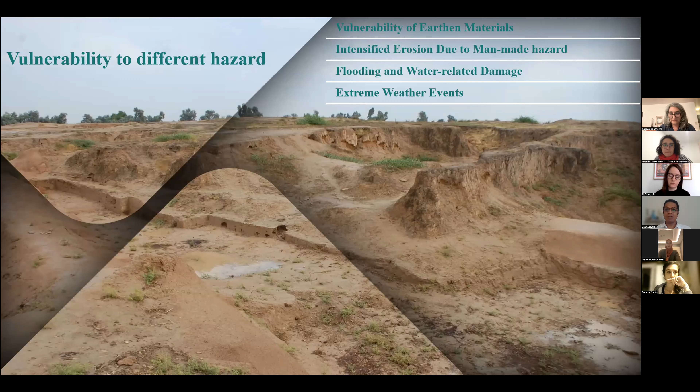For answering the first question, we need to know that the most vital part of earthen construction is directly related to the knowledge of traditional architects or professional masters in dealing with earth and their perception of different risks. Their experience in recognizing ready-to-use mud, adobe preparation, and application methods is entirely based on their tacit knowledge and practical experiences.

Their experience over the years, along with the different environmental conditions, has provided the base for creativity, the use of indigenous capacities and best practices, which can be considered as a practical factor in today's challenges. Therefore, traditional knowledge of local and indigenous people is increasingly recognized as an important source for the conservation of earthen heritage, and it could be introduced as one of the low-cost strategies in the long-term sustainable conservation of earthen heritage

against different hazards. But the transfer of this traditional knowledge has always taken place through the traditional master-pupil system. And the biggest weakness of this system, if we can say weakness, was the lack of documenting and recording this information and the verbal transfer of knowledge to each other. Forgetting traditional knowledge of earthen heritage due to various factors such as modern materials and new challenges, you name it, leads to abandonment of earthen cities.

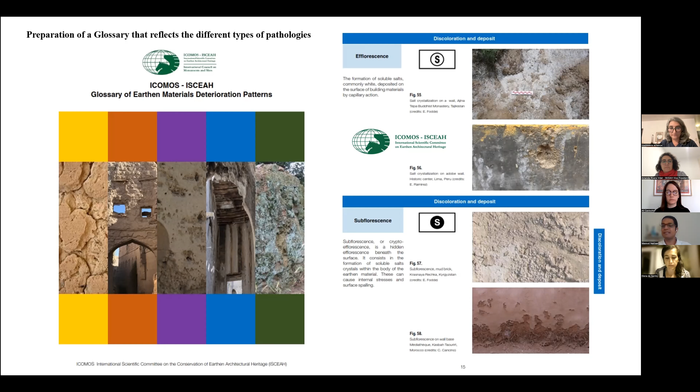For this purpose, in the last 3 years, we have been collecting traditional and modern knowledge of the conservation of earthen architecture. As you may know, conservation is an ongoing cyclical process, and understanding the current condition of conservation techniques is an essential first step to good conservation practice. This database could provide a useful resource for the conservation of archaeological sites in various topics such as methodology, material modification, climate change adaptation, conservation, and restoration.

And in some cases, traditional techniques alone are obviously not able to protect the earthen heritage, and it is necessary to collect and evaluate modern conservation methods. Applied modern techniques and strategies in different parts of the world can act as a useful source to deal with hazards and vulnerability when traditional knowledge cannot meet our needs. At present, it is necessary to collect various conservation techniques, including traditional and modern techniques that have been done in different parts of the world, and to complete the purposeful studies of ISCEAH with the aim of conservation of our valuable earthen heritage.

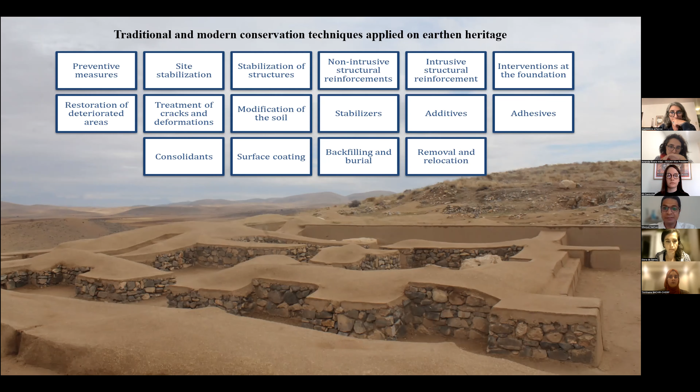The database of traditional and modern knowledge and techniques of earthen heritage could be useful in different studies, and identifying the most appropriate methods will also prevent common and ongoing mistakes in the conservation of earthen archaeological sites. In the end, evaluation of the strengths and weaknesses of these collecting methods could also help to progress the Earthen Heritage Charter and climate change action, as well as evaluating the current state of earthen heritage conservation. So that's it from me.

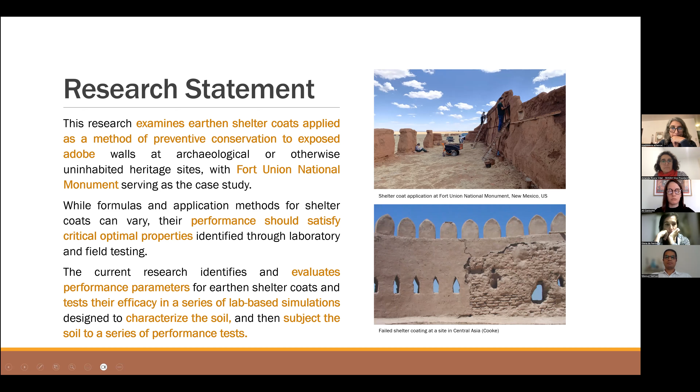Formulas and application methods for shelter coats can vary, but ultimately their performance should satisfy critical optimal properties. So my research identified performance parameters for earthen shelter coats and tested their efficacy in a series of lab-based simulations that are designed to characterize the soil and then subject it to a series of performance tests.

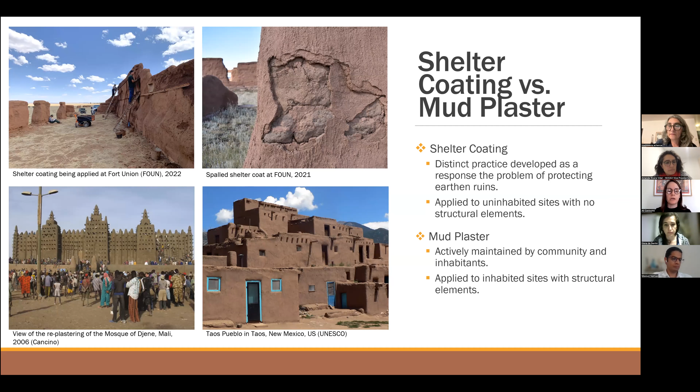So shelter coating is a global practice of applying a mud layer to exposed earthen sites, and it's one form of protection that serves to reduce surface erosion. And it diverges from the practice of mud plastering as a distinct form of preventive conservation that was developed as a response to the problem of protecting earthen ruins. So as I mentioned, shelter coating is carried out by applying a mud layer of similar composition to the adobe or mud bricks. And as we'll see later on, the composition and granulometry of the soil are really critical. Typically the local soils are more compatible with the substrate if mud bricks were made locally, as is traditional.

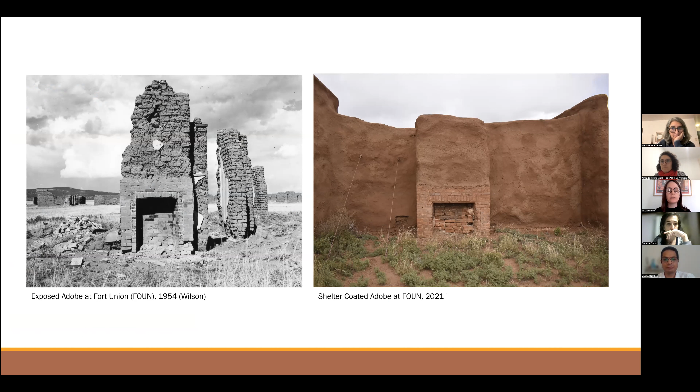And the shelter coat consists of two layers, the unamended mud layer and an amended mud layer that includes a stabilizer to enhance the exterior layer's resistance to water. So if the shelter coat is working as it should, in the case of weather, natural events, the shelter coat will erode rather than the adobe. So it's sacrificial, but with the correct formula and application technique, the shelter coat should last longer and resist spall to help sites in situ with minimal loss of original fabric.

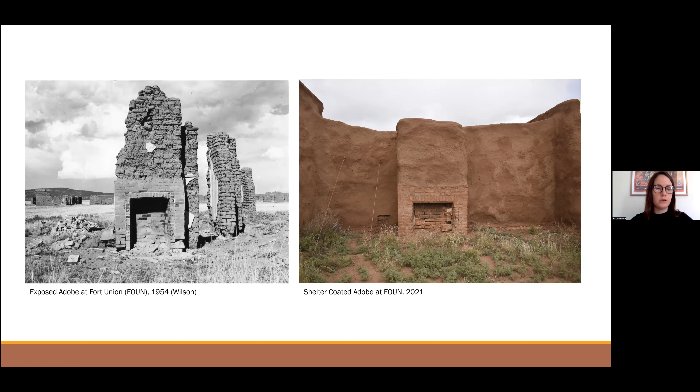One of the biggest challenges in my research early on was this myriad of different terms referring to mud or plaster coatings. And the term shelter coat is referred to really infrequently in the literature. There are many different terms used to describe a shelter coat, including mud plaster, render, even mortar. So there's kind of these terms being tossed around. So part of my research process deconstructed those and unraveled the terms. And as I mentioned, there's really limited research on this method, despite its widespread use globally. There's been more testing done on clay grouts and earthen mortars. So I was able to adapt much of that lab testing to inform my own.

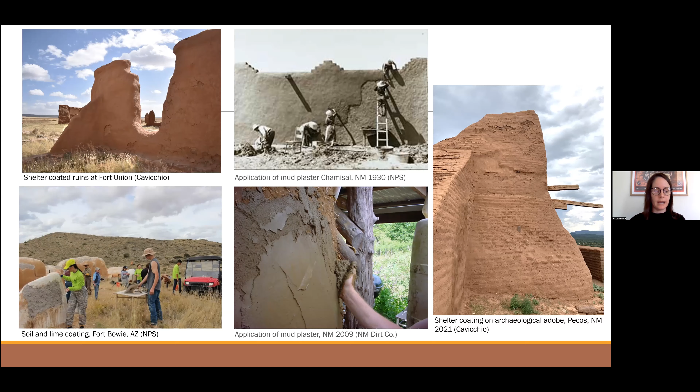So shelter coating is just one practice among a variety of other preventive conservation methods that are used at earthen sites. You can see a few of those here. Some of these are more invasive than others and might have long-term impact for conservation and interpretation at the site.

So shelter coating ultimately allows the site, if it's appropriate at a site, to be protected while maintaining important visual aesthetics, and it also allows visitors to see the form of the remaining structure. At a site like Fort Union, you'll see the kind of layout of it in a second.

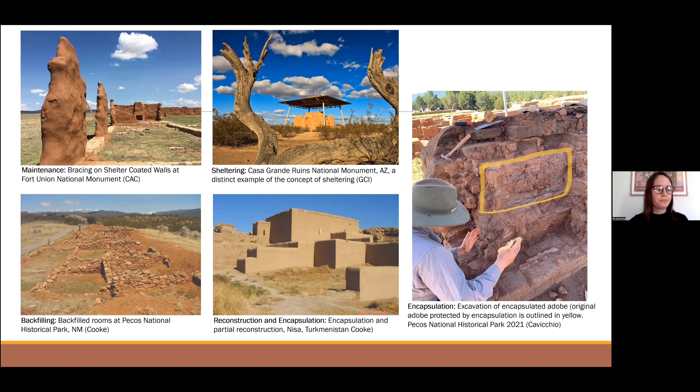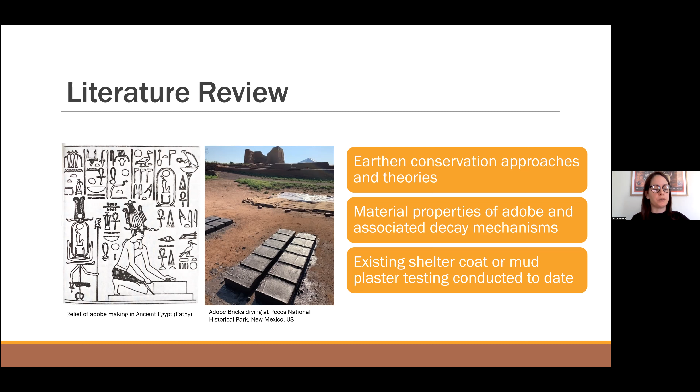So concerning my literature and research, it really consisted of three categories. I looked at conservation approaches and theory to understand concepts that apply to earthen heritage sites and why one might be taken over another, as we just saw. And as I mentioned, there's really little literature dedicated exclusively to shelter coating, but there is a huge amount of information about material properties of adobe that can inform our understanding of shelter coats, which share similar composition. And finally, I reviewed a history of surface treatments used on adobes, including shelter coats.

So just really some quick history. Fort Union National Monument is located in New Mexico in the southwestern United States, and it was established in 1851 to protect settlers traveling along the Santa Fe Trail. The fort was abandoned in 1891, and it was left to the elements, left to looters, tourists, to just run around in for 63 years until it was established as a national monument in 1954. And it's now maintained by the National Park Service.

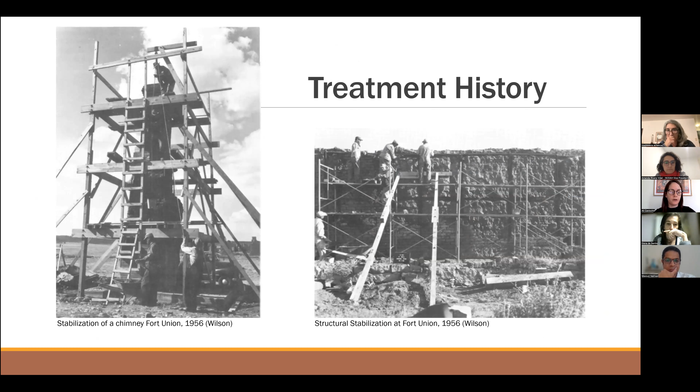So the Park Service has used iterations of protective coatings and tested them at Fort Union from 1956 to present. There were some initial structural stabilization efforts that were carried out that you can see here, followed by a range of synthetic resins applied directly to the original adobe. So there's a long history of use of various products at Fort Union. And Rhoplex E330 is an acrylic emulsion that Fort Union is currently using. It began being tested in 1973 at another site in the southwestern US, and it was the most successful emulsion that was used on the adobes. So word spread throughout the Southwest about this product being great, but the original recommendations for its use in soils were not always implemented.

Just another quick note regarding shelter coat testing: there was a project conducted in the 1990s at another site in New Mexico, and it recommended further research into chemical products like Rhoplex and their application. But since then, up until my research, there's been almost no research, no testing done on shelter coating on historic adobe. So aside from informal changes made in the field, there hasn't been any testing until now.

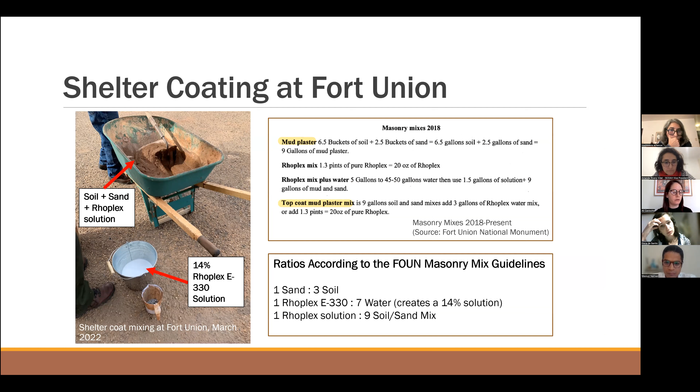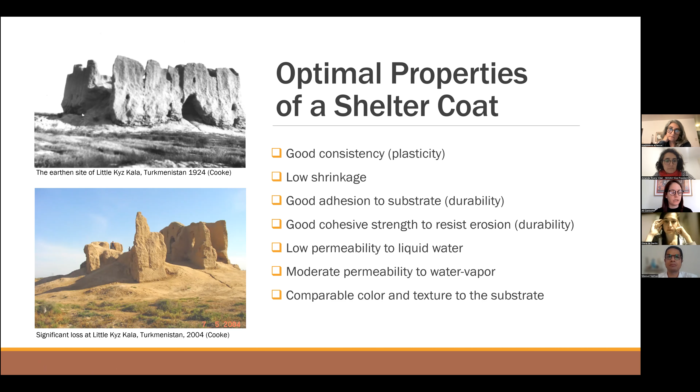The first step in my confirmatory tests on the soil in the lab at Penn was characterizing the soil, and understanding the compatibility of materials is really critical in earthen heritage. As we know, the soil structure can vary from site to site, and lack of knowledge about earthen architecture and materials being used is the major reason for failure at earthen sites.

So currently Fort Union is using a red soil from another region of New Mexico, and they were previously using a brown soil from the area closer to the site. And in talking with staff during some of my site visits, they said that they thought the brown soil seemed to have a better consistency, but no testing had ever been done on site or in the lab to confirm that. And they're adding sand to both of the soils when they use them on site. So moving forward, I needed to determine which soil performed the best, the red or the brown, without any amendments or additions. And so I had these confirmatory tests that I carried out.

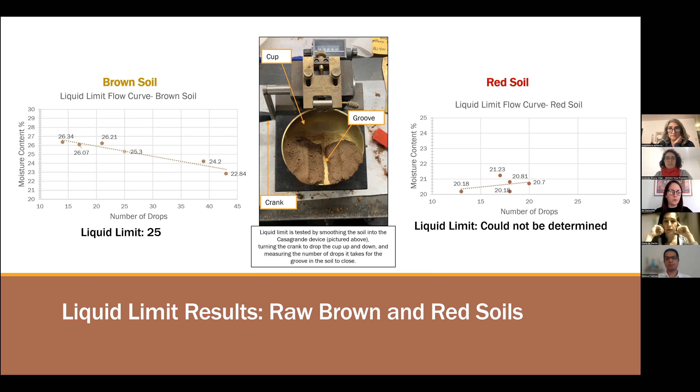The Atterberg limits tests are an important indication of soil performance and consistency. So for those of you who don't know, the liquid limit test measures the water content at which a soil begins to behave as a liquid. So the brown soil had a high liquid limit, meaning that it was able to absorb a higher amount of water before turning into a liquid state. And even with the addition of sand, the brown soil had a slightly lower liquid limit, but still performed plastically. And the red soil's liquid limit could not be determined.

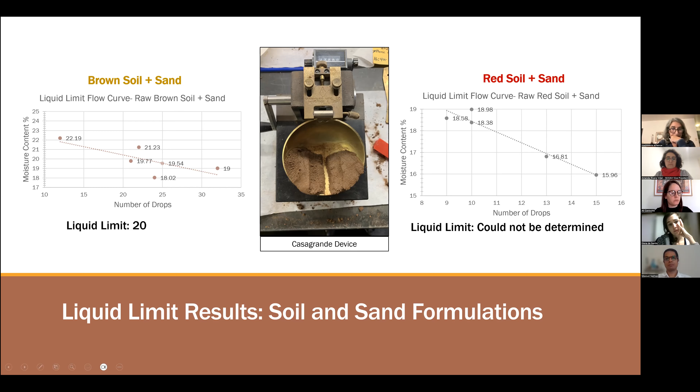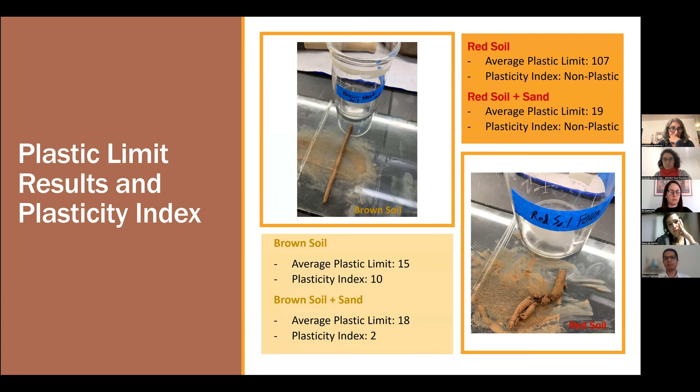Okay. And so the liquid limit and plastic limit ultimately informed the plasticity index. The plasticity index is the range at which the soil's water content allows it to behave plastically, or as a workable soil. So the red soil ultimately proved to have a poor consistency. It was not plastic, not cohesive. The addition of sand lowered the brown soil's plasticity index overall, but it was ultimately still able to perform at Fort Union.

I'll have to go back to this slide for people who are listening. Sorry, Alison, Ali, for that. That's okay. Okay.

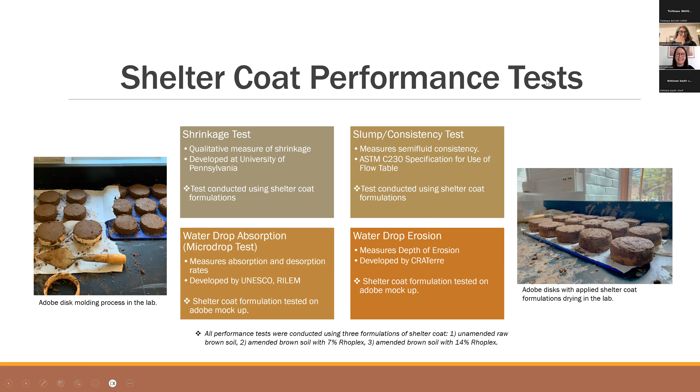So the shrinkage test was the next performance test that I carried out. Low shrinkage is one of the optimal properties required for earthen shelter coats to minimize water infiltration. So ultimately you want the soil to display low shrinkage on its own without any amendments. Since Fort Union is using, as I mentioned, the soil and sand mix that performed well, I needed to test that performance here between the raw soil and the soil with the addition of sand. The brown soil with the sand ultimately displayed less shrinkage, confirming that the sand improved the soil's resistance to shrinkage upon drying.

And then I moved on with the soil and sand formulation. And since Fort Union is using a 14% Rhoplex solution at the site, I tested that. And I also halved that amount and used a 7% solution in the lab. So that informed the 3 different formulations of shelter coat that I used. And the consistency test that you see here on the bottom screen is ultimately a quantitative measure of the soil's consistency. So if shelter coats are too wet, they might shrink excessively. And if they're too dry and not workable, they won't adhere to the substrate. Ultimately, Rhoplex reduced the workability of shelter coat formulations.

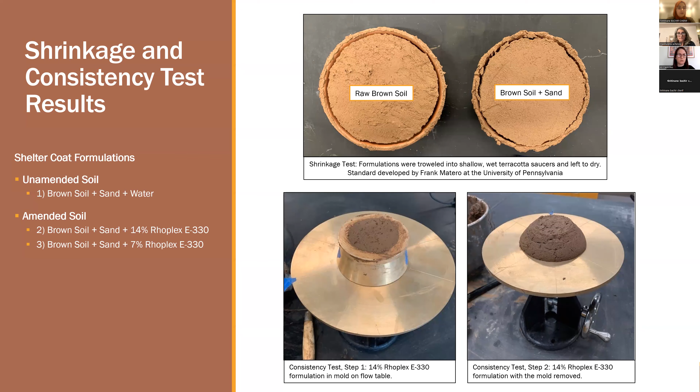The next test was water absorption. And so this is a test of water repellency from the surface. It measures the absorption rate of 1 drop of water and the subsequent desorption rate of that drop. So you want a low absorption rate, meaning high water repellency, but you also need high desorption rates, meaning faster drying. So ultimately, the 7 and 14% displayed high water repellency, but low desorption rates, which is not ideal because we want the shelter coat to dry out more quickly.

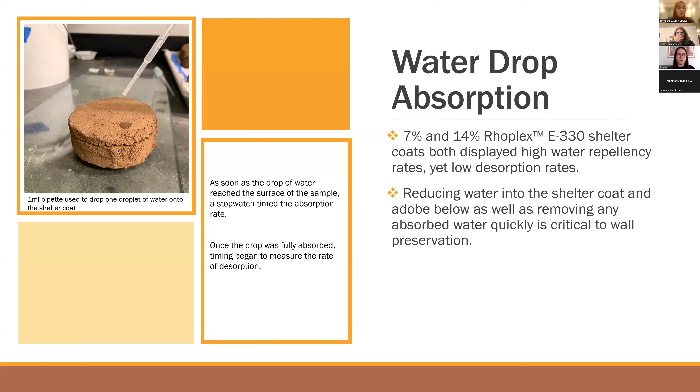Finally, the last test that I conducted was the water drop test. This was developed by CRATerre, and it measures the resistance of an earthen substrate to erosion when exposed to the impact of falling water. And you can see the test setup on the left there, the makeshift lab setup. So to measure the precise depth of erosion on each sample of shelter coat, an approach was adopted using glass microbeads. You can see on the right, the greater the weight or the volume of the beads filling the hole in each shelter coat signified a higher depth of erosion. So ultimately, the higher amounts of Rhoplex resulted in a reduction of the depth of erosion on the sample.

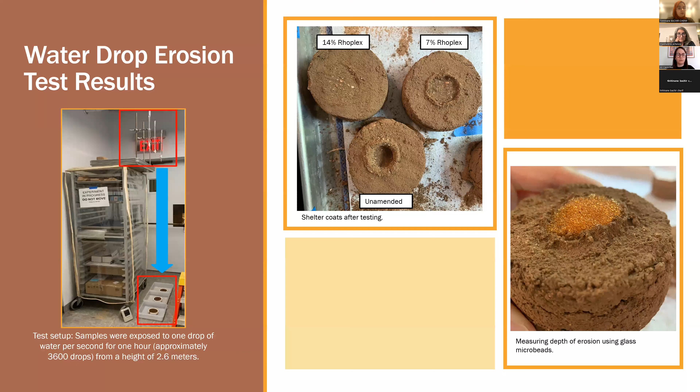So I want to just quickly go back to Masoud's point in the beginning, talking about traditional building materials and methods. So mud plaster and shelter coating itself was not used traditionally at Fort Union, but the results of my research found that the local soil performed better than the soil from a different region in New Mexico. So the point really is that local soils used as mud plaster are typically more compatible with the earthen substrate. And when thinking about using any modern amendments like Rhoplex or others in combination with traditional methods or materials, the testing of the amendment is really critical because the soil type affects the success of Rhoplex's performance. So it might perform well on one soil compared to another.

So ultimately, we again want these optimal properties for the shelter coat. The addition of Rhoplex decreased the plasticity of the shelter coat, and it did not impact its overall shrinkage in the soil. But the performance tests conducted revealed that a higher percentage of Rhoplex at 14% had greater resistance to erosion, but displayed a lower consistency or workability and also lower desorption rates.

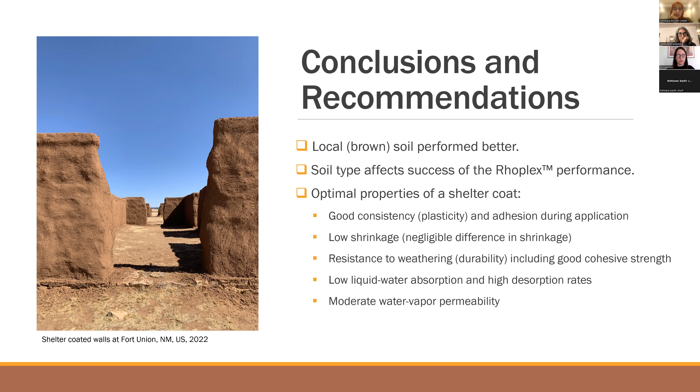So there's a lot more research that can be done on shelter coating, and I believe there's a young woman at Penn now who's kind of continuing this research, so that's exciting. But yeah, continued and long-term testing and research is really needed both in the field and the laboratory to confirm site-specific soils and confirm the effects they're having with varying percentages of Rhoplex.

And regarding the use of synthetic resins like Rhoplex, their impact on the environment is something that hasn't been studied at all. And at most of the sites in the Southwest, and I'm sure it's similar globally, they're just being disposed of at the site. So the microplastics from the synthetic resins are seeping into the soil and probably contaminating the environment, but there's been no research on this. And then another interesting area, I think, of future research could be different application methods.

So at Fort Union, they're using rubber gloves to apply the shelter coating. There's thinking that perhaps there would be better adhesion if you're using just your hand or like a natural glove, like a sheepskin. Other sites use a trowel or a brush. Frank Matero, who was my advisor on this, had a fun thought to try to use a pressurized spray nozzle to spray a shelter coat onto a wall. So that could be an interesting area to research. So there's a lot to be done.